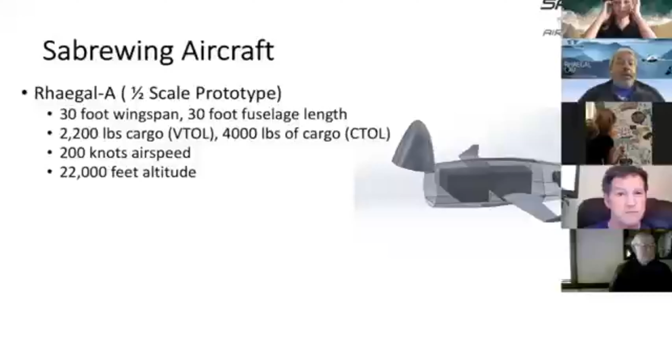I want to offer my congratulations to Dr. Roper and his team for achieving this revolutionary rapid contracting and prototyping method to bring industry and DoD together to develop this new exciting technology with both military and civilian applications. This technology will have great benefit to the needs that we have in Alaska and the Arctic, where conventional aircraft, vehicles, and vessels oftentimes can't operate.

Agility Prime is part of our Defense Department's long history of turning futuristic ideas into reality. I'm proud that the federal government is investing in revolutionary ideas. Agility Prime is leading the way.

This launch of Agility Prime is so exciting. This technology has the potential to make vertical flight more affordable and more widely available. And with the encouragement of the U.S. Air Force and the entire federal government, American companies employing American workers can gain a head start and win a fair share of this lucrative market.

eVTOLs have the same agile, vertical takeoff and landing capability as helicopters, but are quieter and should cost much less to operate because of their electric motors.

We are becoming a trusted innovation partner in commercial tech. I could not be prouder of this initiative. I could not be prouder of this team. And I am excited to see how quickly we can go to help commercialize this market for our nation, so that our warfighters have options they don't have today, and our nation has an economic advantage far into the future.

So it's truly a great credit to Agility Prime. They can put on this virtual event with so many hometowns of the United States represented. Industrial base is not really about just what a country can make. More than that, it's about the people who dream up what to make, and then, of course, those people who make it.

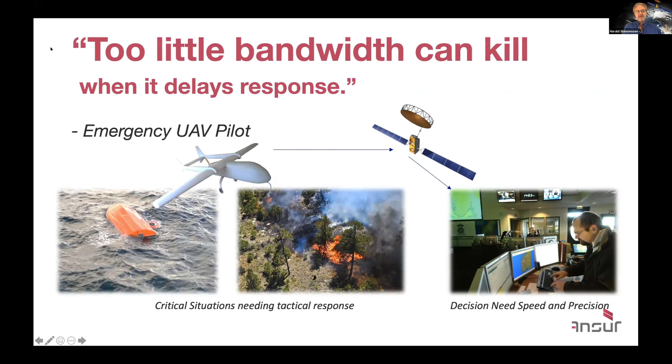I talked to a UAV pilot a little while ago, and he was concerned about the time it took to get his photographs, as part of a search and rescue operation, to the rescue team. He said they were always struggling with the bandwidth problem, and images could arrive too late - people were hypothermic, could drown, could freeze to death. Sometimes it was a matter of minutes, and he literally said too little bandwidth can kill if it delays my response time to the critical content.

I'd like to take you back to the birth of information theory. In 1948, Claude Shannon wrote a paper called A Mathematical Theory of Communication. The year after, his colleague Warren Weaver placed his theory into a bigger perspective. I mentioned earlier I was always working with signal processing, compression, and modem designs, so as an engineer we have been solving the problem of rate distortion - how do you get as much bandwidth as possible on the modem, and how do you compress the sources to as little as possible? But if you talk to an operations manager in the control center, they would probably say something like, I don't care about bits and pixels.

I need to see what I need to see in time for me to respond to it. So it's all about content that has effect on the operations.

This 3-layer communication model was actually written about already in 1949. And I've seen papers that state we probably missed this, and we have been solving as engineers the wrong problem, and the decision makers need another solution in a way.

The 3 layers outlined already in '49 were: the one we all know, how precisely can symbols be transmitted at a certain rate or limited bandwidth. But the next level is how precisely do these transferred symbols convey the desired meaning or content that you need. And finally, how precisely does that content affect the operations?

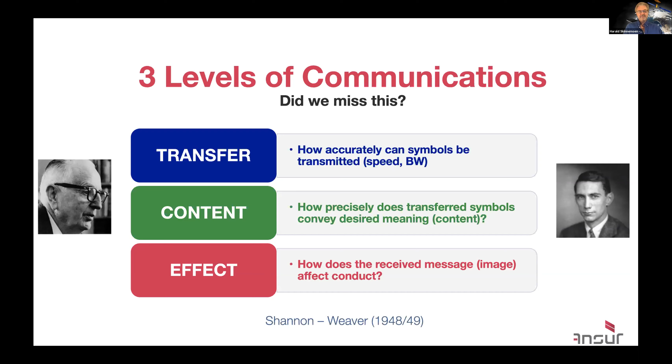What we found is that by focusing bandwidth on content that really matters, we can save as much as 99% bandwidth. So this is much more than just regular compression. It's a new way of thinking about how to and what to communicate.

We all know this. But what if you can cherry pick exactly the parts of the image that you need? For example, by drawing on the received image and saying, I need that part, or letting computer vision AI just decide that part. Then it becomes a bit like CSI Enhanced - you say, I need this specific part in full precision. And that's the way our software basically works.

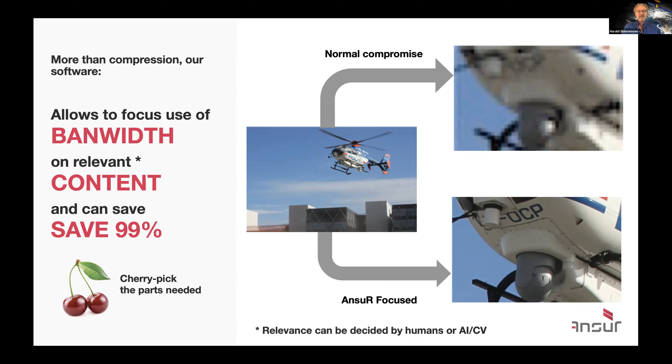You can extend that concept to videos as well and other sensors. So here's an example. If I shoot a photograph with my smartphone, or with a drone camera, or with whatever platform, in high precision, I always tend to compromise and send a lower resolution version. Feel free to scan the QR codes when this slide is up there.

So then we're getting a web quality or a little bit higher resolution image at the other side, but the original is still sitting at the camera. We have then the possibility to pull specific regions of interest from the receiver's side, who is the decision maker with the intelligence and analyst expertise. You can get exactly what you want without delaying the non-essential parts.

Let's see if this plays a little drone video here.

From the receiver side, you can choose what segment of the video you need, the resolution, the frame rate, and the quality of the video. And instead of being 150 megabytes or something like that, this video is just a few megabytes. So it gives you faster, more responsive information, basically.

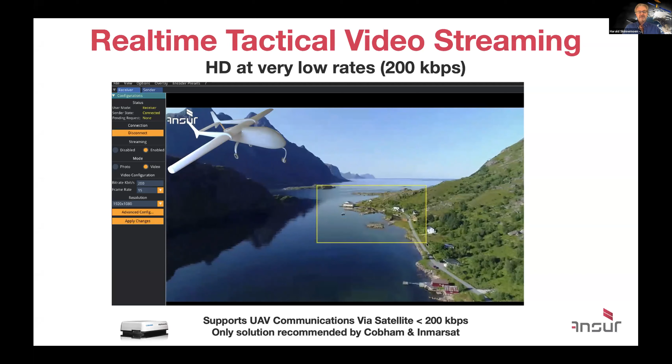Here's the HD, and you may have seen the mouse drawing a region of interest, saying I want to focus my bandwidth on this part of the image, but I want the full 4K resolution for that part. While you're doing that, you can still record onboard the drone or platform the full 4K precision, and through the storyboard I showed you on the previous slide, you can always access that if you need to.

Based on what we're doing, we won something called the Critical App Challenge with Airbus Defence and Space. They wanted to implement, and have certified our software for this specific hybrid device, which uses private mobile radio and 4G networks. It can also tether with satellite links.

US Marines came across our software in January, and we did an exercise in Norway, north of the Arctic Circle, through Iridium Certus at the time, streaming high definition around 120 to 130 kilobit per second. Captain Des Hill, who was in charge of the event there, posted on LinkedIn, pretty amazing technology from AnsuR Technologies.

One of the cool things is that we use this for disaster emergency management with the United Nations, and we have installed our servers at CERN in Geneva. Those of you who are a little bit nerdy will know that this is the place where Tim Berners-Lee invented the World Wide Web, and the world's first web domain is cern.ch, and we have our software running there. So I find that quite cool, but it's also quite nice that we're helping the United Nations save lives in disaster emergency management with this.

For drones and UAVs, typically you would operate on the radio link, which can range from 10 to maybe 100 kilometers. The drones like the one you see at the bottom here have maybe 1,000 kilometers range. So having satellite communication basically unleashes the full operational range.

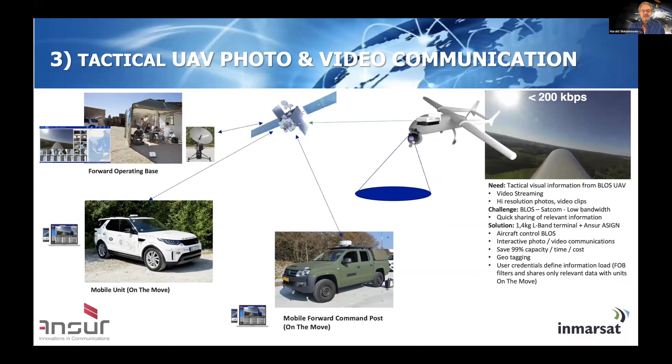One of the scenarios we've been demonstrating with Inmarsat for special forces in Europe is this double hop video from drones to multiple vehicles and forward operating bases. This is quite attractive and working fine with a solution where you have a server in the middle and low bandwidth. You don't have to be concerned that the receiver side might be on equally low bandwidth that the UAV is on. Our software offers one of the most effective photo-video communication solutions with very high precision using the least bandwidth. That's the main objective. It lets users prioritize communication bandwidth on specific parts that really matter, and can reduce network bandwidth requirements by 99%, speeding up access to high precision relevant content.

I'm sorry to interrupt you, we're just going to have to go ahead and switch on to the next person here. Yeah, it's finished, oh okay great. There's a few questions for you in the Q&A, if you want to go ahead and type your answers there for folks. Definitely a few people with more in-depth questions for you. So thanks for coming on, Harald, appreciate it.

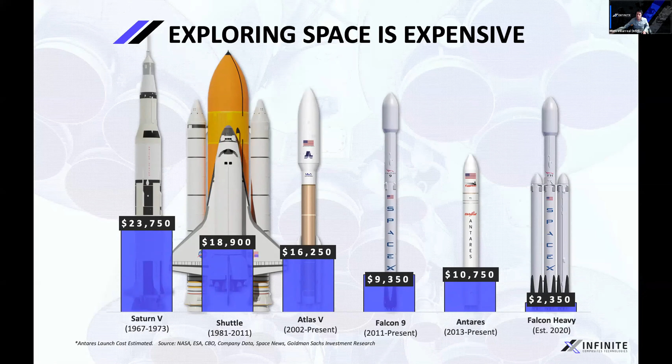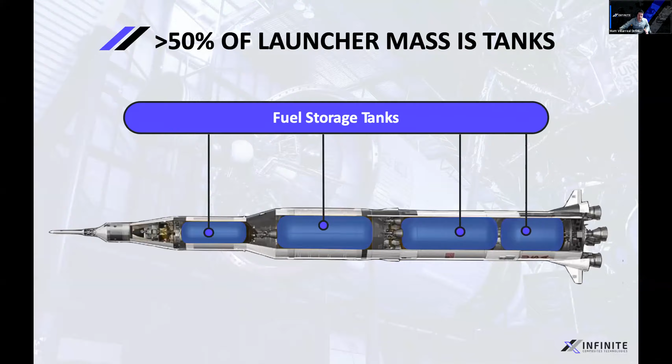Over the past 50 years, the cost of sending cargo into space has been driven down by more than 50% due to the introduction of new launch vehicles built by startup companies, led by billionaire tech entrepreneurs with grand visions of exploring the universe. Major innovations have been made around engine technologies to increase how much cargo weight can be lifted into orbit, but we've made little progress around reducing the heaviest part of almost any spacecraft or launch vehicle: the fuel storage tanks. Even on lunar landers and satellites, fuel tanks can make up more than 50% of a vehicle's empty weight. These highly engineered tanks often serve as many vehicles' primary structures. There can be more than 100 tanks on board per flight.

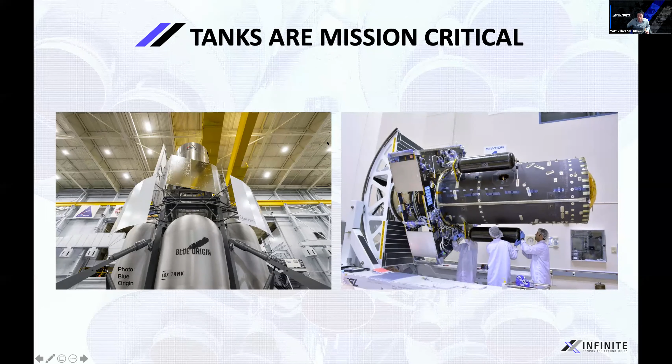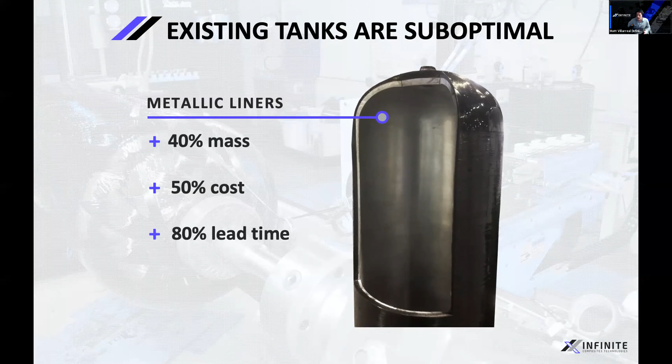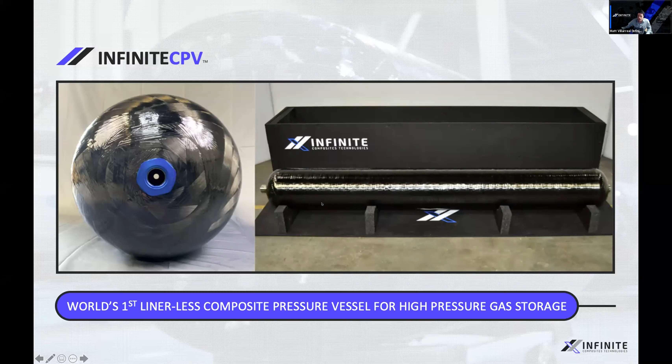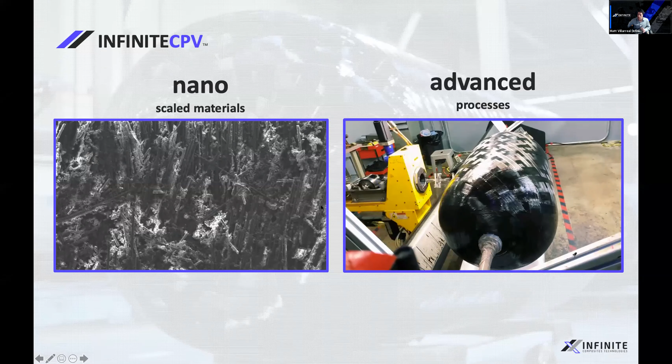Even state-of-the-art tanks typically require a metal liner to contain the gas. These liners are a major driver of mass and cost, and their lead times can extend expected mission timelines from months to years. My name is Matt Villarreal, and I'm the founder and CEO of Infinite Composites Technologies. Along with my co-founder, Michael Tate, our team has spent the past 9 years working to achieve what has been the pressure vessel industry's holy grail for decades. That's why we introduced the Infinite Composite Pressure Vessel, the world's first linerless composite pressure vessel for high pressure gas storage. Our technology leverages nanoscale materials and advanced processes to eliminate the need for a separate metal liner and provide the optimal solution for storing compressed and cryogenic fluids.

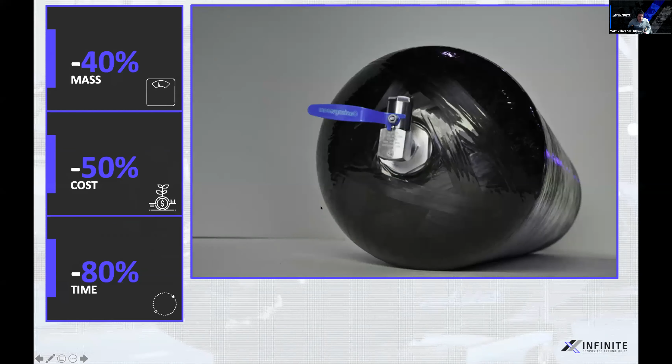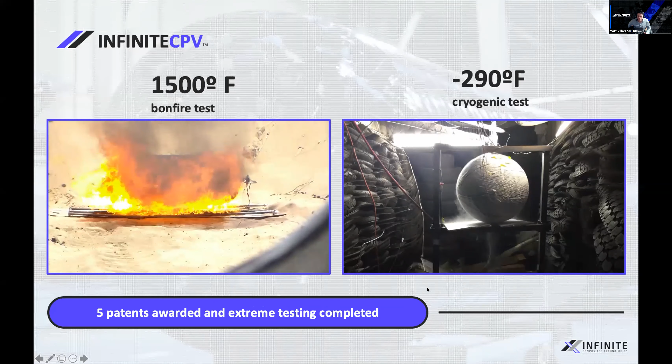This enables up to 40% lower mass, up to 50% lower cost, and 80% shorter lead time versus state-of-the-art tanks. We've been awarded 5 patents and have put our technology to the test in extreme conditions to prove their safety, even in the harshest environments. Since our founding, we've delivered more than $3 million in contracts to customers like NASA, the Air Force, the Army, and private space companies. Already in 2020, we've delivered 11 tanks to 2 different NASA centers and a private launch company, and have secured contracts to deliver 20 more by the year's end, a 500% increase from 2019. This includes initial hardware for a 300 satellite constellation, multiple space launch vehicles, and an electric passenger aircraft. These projects alone will grow to 780 tanks and generate $11 million by 2022.

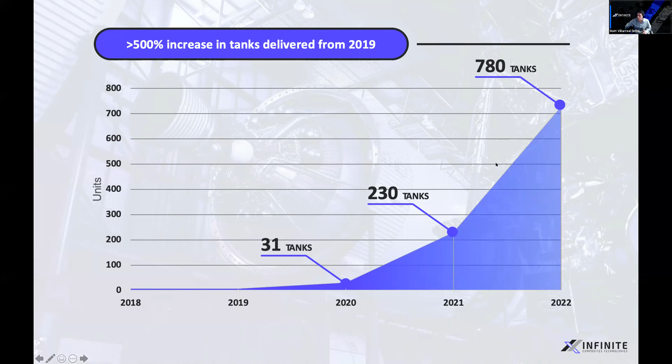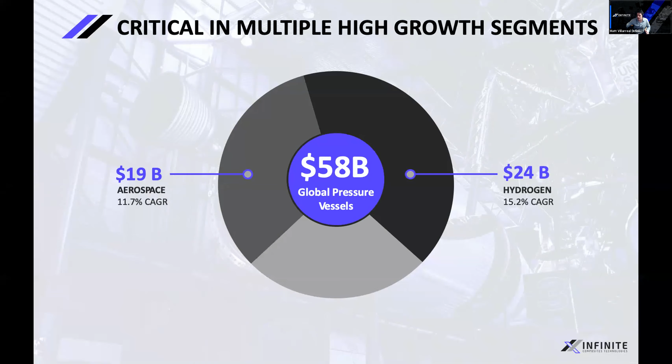Our technology is a game changer in a broad range of applications: underwater, on the ground, in the air, and beyond. While space is our beachhead market, the overall demand for the $58 billion global pressure vessel market is booming. And with the emergence of the hydrogen economy, the industry is poised for exponential growth over the next 5 years. I'd love to talk to you about how our projects can keep your projects underweight, under budget, and on schedule.

Thank you. Hey, thanks Matt, just a couple of questions. I think as it applies to our Agility Prime community, the most interesting topic is hydrogen. Just a little bit on your tanks - what kind of pressures are you rated to, and what kind of mass fractions are you getting to for hydrogen storage?

On the mass fractions, without going to any exotic fibers, we're able to get roughly 10% storage efficiency. The tanks we're building for the electric aircraft are 5,000 PSI hydrogen tanks, but we've built tanks that go up to 14,000 PSI, even after 20 years of simulated useful life, so 20,000 pressure cycles. The upper limit on pressure isn't necessarily a limiting factor, but the tanks we're building right now are 5,000 PSI for high pressure hydrogen. We've also got an MOU with the Air Force Research Lab for liquid hydrogen tanks for an aircraft program being developed by them.

Very interesting. And I guess the main difference here is that you aren't using the metal liner. Are you seeing comparable leakage rates or seepage?

The permeation rates on our tanks are similar to Type 4, which is plastic-lined composite wrapped. That data is a little dated, about 4 years old, but we're about to do another permeation test on the hydrogen tanks we're building for this aircraft program. So we believe we can get nearly on parity with the metal-lined tanks once we get that new data.

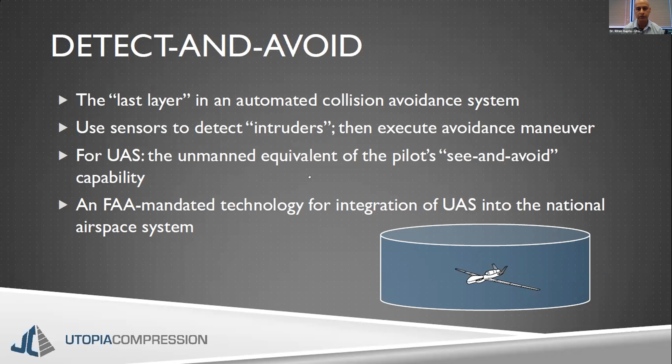So specifically what we do is passive ranging, and I'm going to talk about why that is important. There's many ways to detect an intruder - cooperative ways such as ADS-B or ACAS-XU, but obviously not all intruders are cooperative, and we need to be able to handle any intruder. So non-cooperative ways involve using sensors such as radar and optical. Our forte and our product uses optical sensors.

And why are they important? Well, optical sensors are basically cameras. They're small, much cheaper than radars. They're low power and they're passive - that means they're non-RF emitting. That's very important because you don't have to worry about compliance issues with RF. Obviously, in a military setting, passive is important because you might want to be covert, but regardless, there's many advantages of being passive.

Okay, but there's issues with optical. Anybody that's aware of the idea of tracking and estimation of targets knows that with an optical system you can't estimate the range because a camera image is just a 2D projection of the 3D world. So the ways to get around that are if you have multiple cameras. Stereo camera systems allow you to do what human eyes do, and they can be used to estimate range. Or you can fly in a meandering path, and if you get multiple views of the target or of the intruder, then that can be used to estimate range.

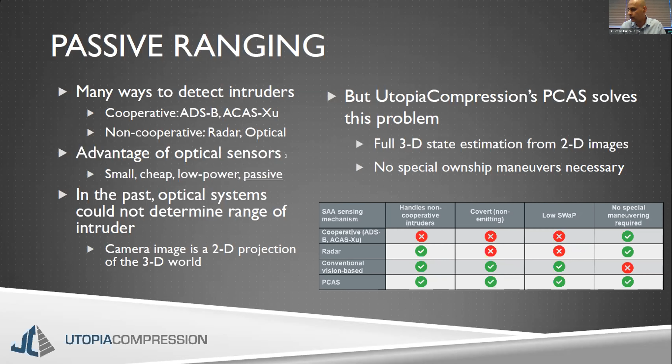So what our technology, which I'll be talking about, called PCAS, does is it really solves that problem. It allows you to fly just in a straight line using a single camera, and it's low cost and lightweight, and gives you a full 3D estimate of the intruder without any of these special maneuvers, so to speak. Just want to make sure - yeah.

PCAS is basically a low-cost system. It does passive ranging for detect and avoid, but also for situational awareness for piloted aircraft.

Several applications are listed there. Obviously, flying cars and orbs is the focus here, but also small UAVs for package delivery. Search and rescue drones is an ideal application because you might have a drone with an optical sensor looking down at the ground for survivors, or a law enforcement application where you want imagery of the ground. In those areas, you're flying in relatively clear skies where optical sensors are ideal anyway.

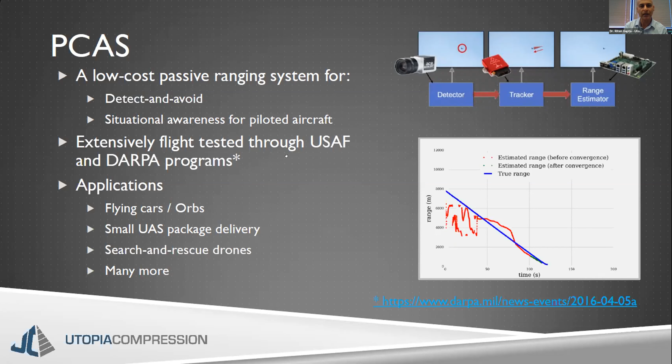So optical sensors would be ideal for detect and avoid as well, and many more. One I forgot to mention is military applications for surveillance and reconnaissance. We actually have interest from the Air National Guard for the MQ-9 program for a long distance version of this, where being passive is of paramount importance, since these aircraft have high power optical sensors on pods such as the MTS-B pod. We've been in discussion and have an MOU, and we're trying to get AFWERX interest in carrying out that program. We feel confident something will happen there as well.

Lastly, the past, present, and future. Up till now we've had a lot of funding from the Air Force and DARPA. The initial motivation came about for a passive ranging solution for the Global Hawk. So far, our systems have been single camera, 40-degree field of view systems.

Currently, we are collaborating with New Mexico State University and their UAS test site, and we have funding from the FAA to demonstrate an expanded field of view, 220-degree system. We have four test events planned over the coming year, of which we've already carried out one. So we're excited to push this further.

Obviously the future will involve commercialization of this product and entering the market. As I said, it's very important for UASs because this is an FAA mandated technology, but participation in Agility Prime would be a great desire of ours. We're looking forward to working with anybody that has interest in detect and avoid, or any other interest in this technology. We're happy to work with anybody and answer questions. I think I'm at the end there.

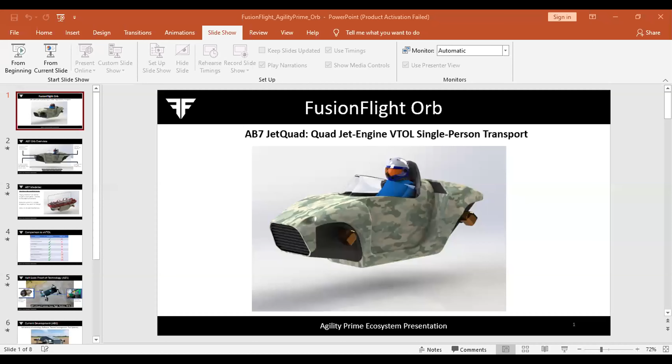We've been developing a VTOL jet-powered vehicle since 2016. My company is a startup, very small, I basically do everything at the company. I still work out of my garage at the house, so that's kind of like the background.

So I'll start by covering our single-person transport, which you can see on this first slide. This is a concept based on our half-scale model. As you can see, it is the most compact type of orb that you could possibly have for a single person. It is powered by 4 microturbine jet engines, each outputting 120 pounds of thrust at full throttle. Each engine is equipped with a proprietary thrust vectoring system that allows vertical takeoff and landing operation, hovering, agile maneuvering, as well as high-speed downrange travel.

State-of-the-art avionics allows autonomous mission execution. That means that the pilot's hands are free, he's able to use and do anything with his hands as he sees fit. A vehicle, as you see here, would have anywhere between a 20 to a 30-gallon tank, again depending on the application. So that is the first application, would be this high-speed single-person transport.

In the same configuration, we could build emergency medical evacuation, a medevac - as I call it, a flying stretcher. It's very compact, so it can land in very tough to reach places that are normally inaccessible by helicopter, and then evacuate the patient to a nearby base or hospital at very high speeds. Again, for this non-aerodynamic version, you're looking at something like 250 miles an hour. And of course, it's based on the same platform as the single person transport, so one technology can give you both of these vehicles at once.

Now I just want to explain that this is not an electric VTOL concept, this is a jet powered concept. It's fueled by heavy fuel, diesel, Jet A, kerosene. And it has a lot of advantages over eVTOL, which is commonly found in the ecosystem today, and there's a number of items why it's advantageous. Of course, it refuels in minutes, you don't have to swap batteries or wait hours to recharge.

Heavy fuel compatible - out in the war zone on the battlefield, diesel, Jet A are readily available. It is long range - again, the vehicle that I showed you there could travel up to 60 miles one way. Obviously high speed, turbine jet engines are not limited to speed as much as propellers, so you could potentially build something that travels close to the speed of sound. It's highly compact and does not weigh a lot, so this small single person transport unfueled weighs roughly about as much as a single person, maybe 130 pounds, easily carried by 2 people, fits on the back of transport such as a Humvee.

Of course, you got your high altitude operation, very high altitude - again, rotors, propellers cannot reach and operate well at the same altitudes as turbine jet engines can. You get weather resilience since you're using thrust vectoring and the engines are internal to the vehicle, no moving propellers, no external airfoils. And it is an affordable system because it uses entirely off-the-shelf components.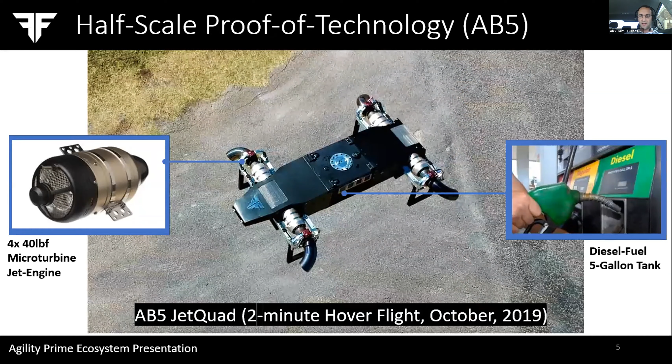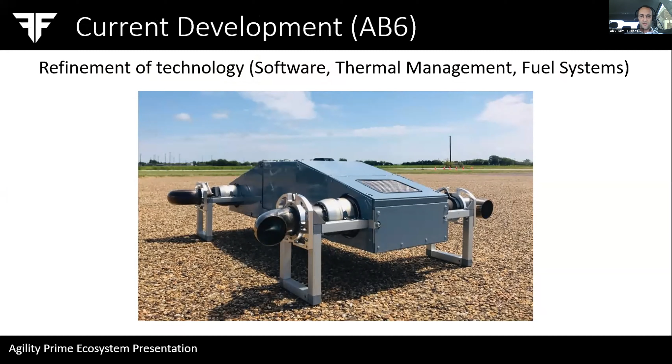Currently in development is the AB6. As you can see, it's the same half-scale model, except I've refined many of the technologies to make it a more reliable vehicle — including software, thermal management, fuel systems, and pretty much everything. I'm ready to go into qualification flight testing for this vehicle within the next several months.

Just a brief overview of where we were and where we're going. We received an original seed investment of $50,000 in 2016 to build this half-scale version, and achieved stable hover in 2019. We require about $5 to $20 million in investment to finish R&D, scale up the version, and transition to production, including establishing a facility. At the moment, I'm doing everything out of my garage. Finally, if everything goes to plan, we will have the AB7 orb available for purchase at an affordable $400,000 per system, hopefully from year 2023 onwards.

For more information about the vehicle, detailed description, and specifications, you can go to our website. There's also a YouTube link for the flight video of the AB5 jet quad. If anybody has any questions, I'll be more than happy to answer them.

Yeah, for sure, Alex, that's great. Interesting to see you guys are getting ready to start doing more certification flights — really exciting stuff there. So I have a couple of questions from the audience here.

Bill Kleinbacher is asking about range, performance, payload, and speed. So the payload for this AB7 would be 200 pounds — that's what we're shooting for. It's basically a standard weight for a human plus some gear, not a lot. Expect the range to be about 60 miles one way on a single 20-gallon tank. That flight will take about 15 minutes, going at approximately 250 miles an hour.

There's an anonymous attendee who just wanted to give you some motivation — Steve Jobs also started in his garage. So, okay, thank you.

Just a little bit on the acoustic signature — I assume it's pretty loud with the turbines. Turbines are a common misconception that they are much louder than eVTOL, but this is very high frequency noise, so it dissipates very quickly with distance. If you're up close, 1-2 feet away, it's very loud, but once you get past 20-30 feet, it's not even that loud anymore. Any propeller-based vehicle, electrical or not, generates quite a lot of noise, so it's worth exploring whether jet engines are really much louder than very large propeller blades spinning at high RPM. On top of that, we are exploring noise suppression systems — the AB6 prototype has specially designed intakes and a body that suppresses a lot of the noise from the turbines. I have 2 little kids at home, and they do tests in my backyard and sleep just fine through them, so I don't think this is going to be an issue.

Gregory was asking why there are no wings on it for transition to horizontal flight, and whether we explored having aerodynamic surfaces. Absolutely — you can head right to my website. We have explored it. Boeing and NASA did a great study on the blended wing body design, and that's really the optimal design for us because it has a very large internal volume, so we can fit our platform with the turbines in there, and we can also use the whole body as a lifting surface.

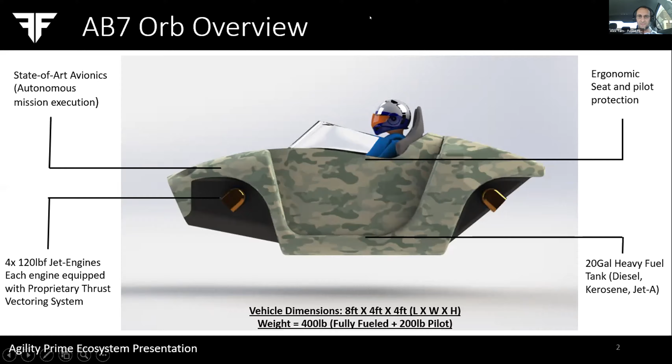So we're going to switch over now to Mr. Michael LaCourie, CEO and founder of Aereo. Michael, did you want me to share your slides for you? Actually, can we skip me? It's been churning trying to connect to Zoom for the last 15 minutes, and I don't know why I can't connect in. So maybe skip me, come back, because I don't think you have the current version of my PowerPoint. I just discovered that—okay, we'll skip you, we'll catch you at the end. So okay, Mike, thanks, if you're ready we're going to switch over to you, Mr. Mike Bartlett, founder and president of American Aerospace Engineering.

Certainly. Mike, just turn on your camera there as well. Thank you, sir. I want to get my camera on. Oh geez, there my camera is on. Can all see me? Yeah, perfect. If you could just go to full screen. Perfect, full screen, and how's that? Off to the races, sir. Over to you, thank you.

Thanks, Sterling, and thank you for the invite, I really appreciate it. I'm Mike Bartlett, president and founder of American Aerospace Engineering. We're in the business of designing, developing, and building full systems—a system of systems—VTOL aircraft, predominantly tandem tilt wings. We've been doing this for quite some time.

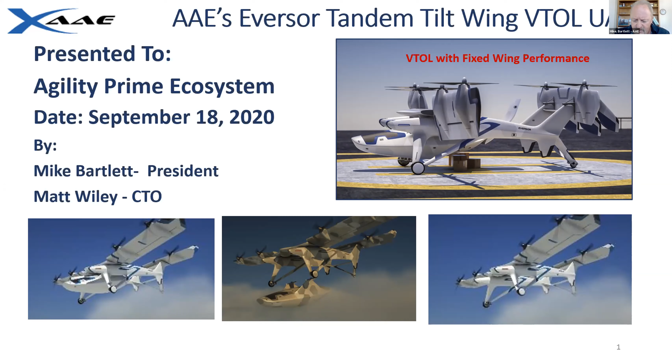I don't know if you all can hear me well. I'll carry on. Yeah, sounds great. Good. My background—I've been around a while.

There's my email address, the website for American Aerospace Engineering. AAE was founded in 2008. As I said, I'm the founder, sole owner, chief engineer. I've got 40 years of aerospace engineering experience with 23 years of FAA flight test. I'm a fixed wing, rotor wing pilot, FAA certified, instrument rated pilot, was a captain in the Air Force, and graduated from National Test Pilot School a few years back. I've been designing and developing UAVs for over 14 years now, and two of the well-known ones are ScanEagle and Blackjack. I helped with the continuous improvement of ScanEagle and helped in the initial flight testing of the Blackjack, getting it into a STUAS program.

Okay. Just as our progression—in 2008, the top figure on the left-hand side is our proof of concept. There's a 40-foot wingspan, internal combustion engines, and you can see the sheer size of it by the folks standing next to it with the wings tilted. The picture below shows the vehicle without a payload bay, and then various other images of vehicles we have.

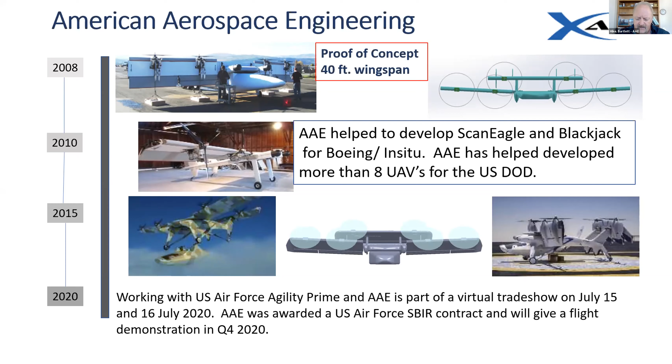The AAE Eversor family of products are fully scalable, and we address all the groups of UAVs - it's the same vehicle, just scaled. Group 1 is 0 to 20 pounds, group 2 up to 55 pounds, group 3 larger up to 1,300 pounds, and group 4 over 1,300 pounds. We've done UAVs from 5-pound UAVs, and I've designed UAVs up to 20,000 pounds, so we've covered the full range.

We don't just do the aero performance, we do the materials, the composites, the avionics systems, the software, propulsion systems, ground control stations. We're a one-stop shop.

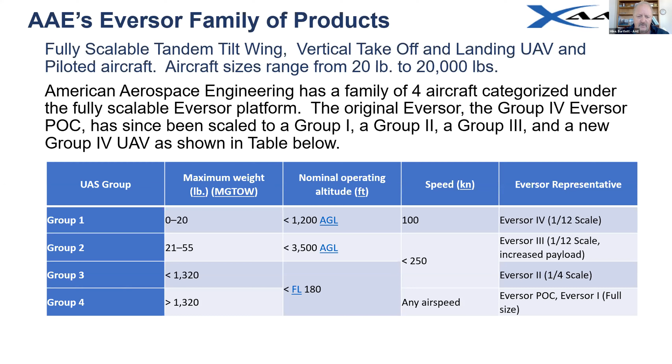What's unique about this vehicle is that large payload bay is detachable. It's also designed as a lifting body - you could see that quite quickly. We've done extensive CFD work on this vehicle, and the payload bay generates over 30% of the overall lift. Also, we're not dedicated to that shape of the payload bay.

We envision that a customer would have a family of payload bays dedicated for various missions. Also, what's kind of neat about this vehicle is the payload bay can move back and forth, so it has variable stability - if you're coming in for an approach, you'd want a forward CG for a more stable aircraft. If you're on a long range flight, you go a little bit to an aft CG to reduce trim drag. Coming into the hover, obviously you want it in a mid CG, and this is all done via the autopilot.

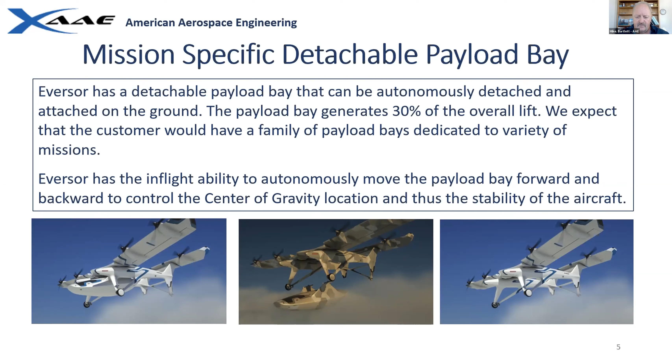Our mission right now is for the US Air Force SBIR award. The award was for an unmanned aerial system aircraft rescue and firefighting program. For phase one, we're doing a flight demonstration with our 360-pound vehicle, showing that we can douse out a fuel spill fire about 3-foot diameter in the hover. We are demonstrating 2 fire retardant techniques: using a sky cannon coupled with an infrared camera to disperse the fire retardant with pinpoint accuracy, and a second method, the air attack method, of just flying over the fire and dumping the fire retardant on it.

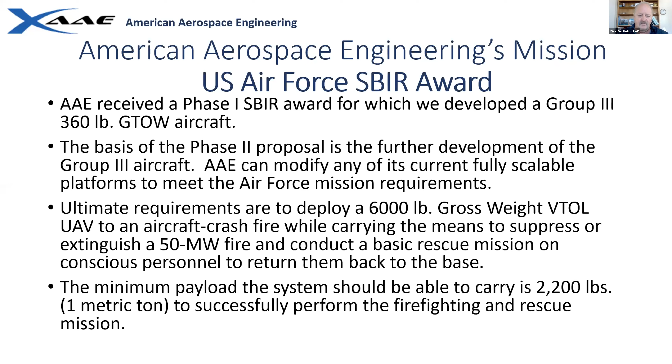We received the SBIR for the 360-pound vehicle. The basis of the phase 2 proposal was that the Air Force were looking for a UAV that could be stationed at their Air Force bases. If an aircraft takes off and gets in distress, or is coming in distress and has to do a forced landing outside the perimeter of the Air Force base - maybe rocky or forested terrain - this vehicle would take off and fly to that area. It could dispense 2,200 pounds of fire retardant, enough to put out a 50 megawatt fire, and then in the hover, it could basically hoist conscious personnel up onto the aircraft and fly them back, or hoist folks down to help get people out of the crash vehicle. That's the mission the Air Force is looking at for phase 2 and phase 3.

What is our role in the ecosystem? We've been working really hard for the all-electric FAA certified Uber Elevate challenge, and we've already designed the 8-seater VTOL. Battery technology is still trying to catch up for endurance and density, so there's a bridging opportunity for us to use hybrid, and we've done this already. It's also FAA certified - I've got over 23 years of FAA certification experience, so everything we do is DO-178C compliant. It's all FAA certified with multiple redundant systems, so if you do have an engine out, you're not just going to crash and burn.

We're also looking at VTOLs, working closely with the California Fire Department on large UAVs to help put out forest fires and rescue survivors in the forest, working with a company that's been around for 60 years called Simplex.

That's their job, doing supplementary type certificates on helicopters to attach these large tanks that carry water to put out fires. And they were looking at high-rise building fires around the world, so you could even use a smaller UAV in between the buildings to pinpoint a fire that's just started and quickly put it out.

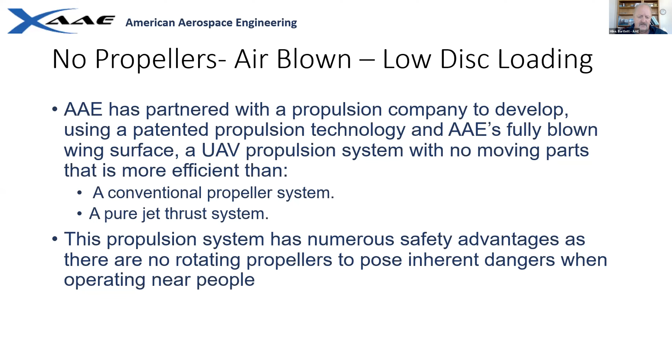So it seems to be more efficient than the conventional propeller system, far better and more efficient than the jet thrust system. And obviously, not having rotating propellers, as they do pose an inherent danger operating near people.

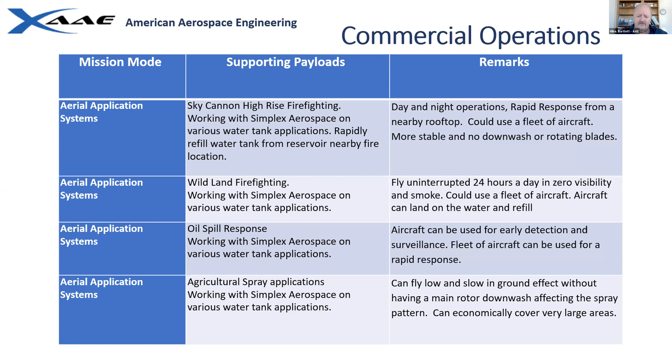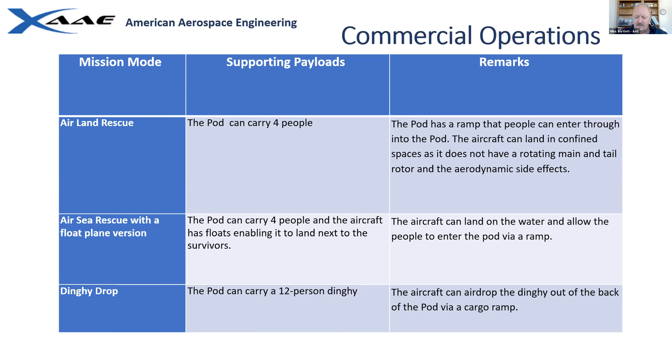Commercial operations - I'm not going to go through everything, but just aerial applications. We have the Sky Cannon for high-rise firefighting, wildland firefighting, oil spills, agricultural spray applications, air-land rescue - that's awesome because the pod we have right now could pick up 4 people very easily. What's exciting with the air-sea rescue operation is that the vehicle can have floats with very little drag penalty. It could land on the water, open up the ramp, and the folks could climb into the payload bay and it could take off, or it could fly low and drop off a dinghy for the folks at sea who need to be rescued.

FedEx has shown interest, and we've been talking to them for about 2 years now. We're sure that UPS would follow suit.

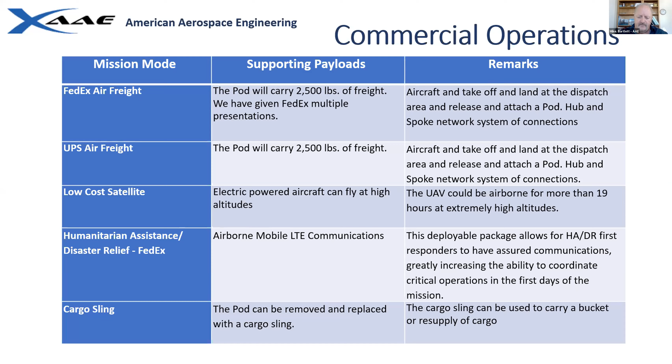Being electric, the solar powered version, we could look at high altitude, low cost satellites. A lot of this could be used for disaster relief, for mobile cell phone towers. It can be treated as a helicopter, so it can cargo sling loads and just drop them off. It can hoist folks up and down. Cargo drops - it's ideal for logistics resupply.

Also, EO, IR camera, ISR missions. It could have an endurance up to 19 hours. And it's ideal as a first responder for medevac, casevac, whatever the case may be.

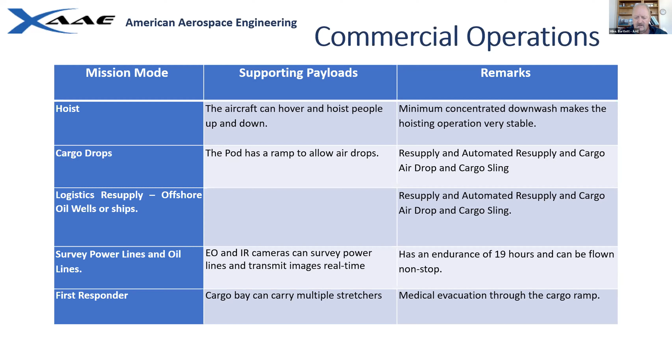What would be good is if there are folks interested, you could facilitate meetings with potential customers and investors if need be. We understand the US Air Force requirements for a program of record, and you did mention that you could get test ranges and certification support, which we would really appreciate. And I think that's my last slide.

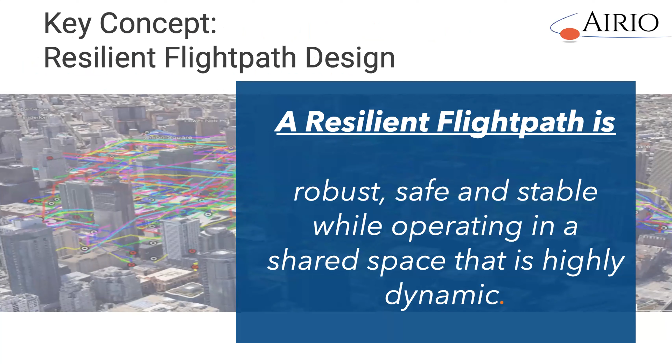We've identified 9 essential criteria for resilient flight paths. I won't spend a lot of time going into these, but they focus on mission objectives and defining the navigational space.

That's using digital twin technologies, for example, in urban environments, developing several kinds of flight path deconfliction, as well as midair detect and avoid deconfliction, making sure we're compliant with all the regulatory requirements. There's also the ability to execute the flight path in real time, which requires transferring that flight path information from the cloud, where we're doing the flight path planning, into the vehicle itself, and then having that vehicle execute the flight path precisely. I'll share with you how we plan on doing that.

The ability to manage simultaneous flight paths - we can currently do as many as 350 vehicles per square kilometer, which is an insanely large number, but we're really trying to push the boundaries of our technology. Obviously it's got to have certain management functions that allow operators to manage multiple vehicles at once, and we're relying a lot on machine learning and artificial intelligence to do that.

So the flight path automation system that we're developing has 4 core innovations we're bringing to the current system. One is new flight path creation algorithms. This allows us to deconflict the flight path in the process of constructing the automated flight path itself, so it allows us to manage multiple vehicles operating in the same space, trying to navigate around each other, but without actually imposing any conflicts.

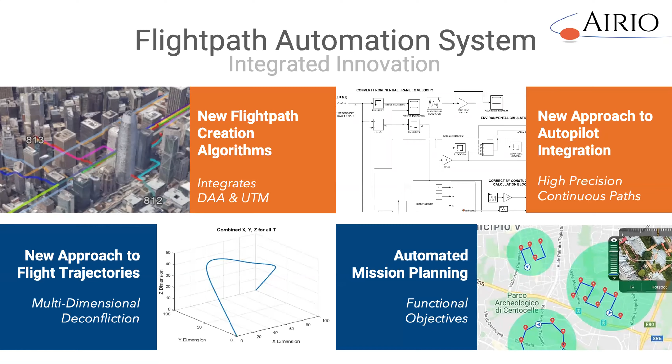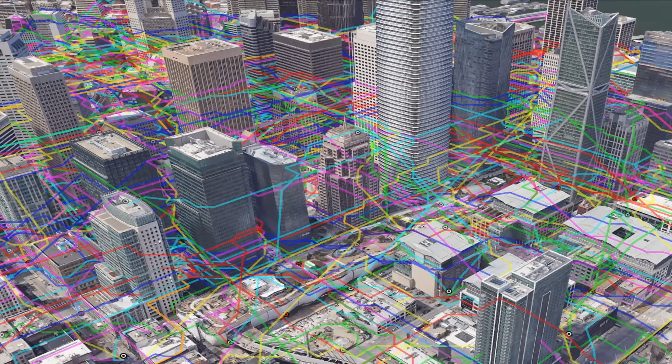So this is an example of one of our simulations. This was downtown San Francisco - that big tall building in the middle is the Salesforce Tower. It's about 1,000 feet, which is well above the 500-foot floor for the low altitude drone space. We basically ran a simulation with 350 vehicles operating in a 1 square kilometer section of San Francisco, and we were able to successfully deconflict all 350 of those flights.

The way that we do that is we've got 5 core components. There's a navigational space model, which defines the operational space in the environment. There's a pathfinding and auto routing section - this is where we take auto routing technology, mathematics that have been developed since about the 1950s, that allow us to take multiple traces and ensure they each have a unique path. We use cost function optimization to make sure there's solid alignment with the mission.

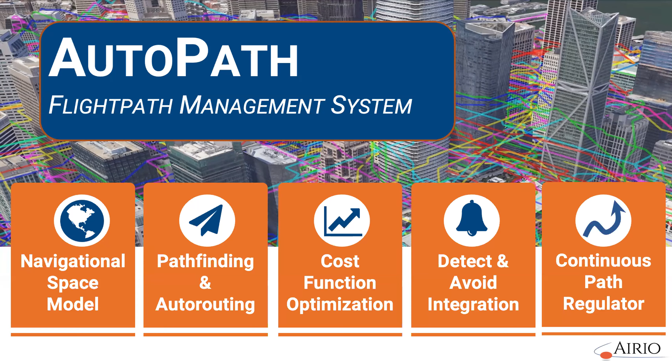We use detect and avoid integration strategies to allow us to avoid any unplanned mid-air conflicts. And then we have the continuous path regulator that translates that information into the vehicle.

So this is a simulation that we have of a number of vehicles in a vertiport configuration flying out of the ferry building in San Francisco. And you can see that it effectively sends each of those different vehicles off on its own path without forming any conflicts.

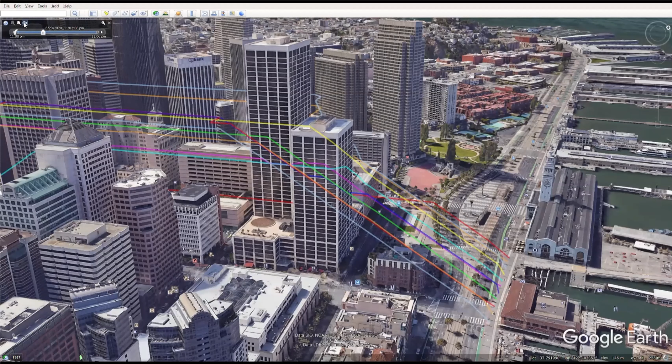In addition to that, we can align the pathways so that when multiple vehicles are headed in the same direction, they can converge into what we call a virtual highway - a temporary reserved space in the airspace that allows vehicles to migrate as traffic demand requires, but also allows for safer transportation of all those vehicles operating in the same direction.

So the system that we've got in development here allows for multi-vehicle path search and optimization. It allows for mission scheduling, so we can schedule out and plan for multiple vehicles operating over a period of time. We're planning on using automated UTM authorization systems through API calls, etc. We have the integrated navigation and tracking and reporting functions.

We've got 6 patents that we have access to, 2 of which are our own that were developed in 2019, and then we have 4 others that my co-founder David developed back in 2016 under a different company, and that company right now is just a shell company that owns the patents. So we've made an arrangement with them to further develop and commercialize those patents as well.

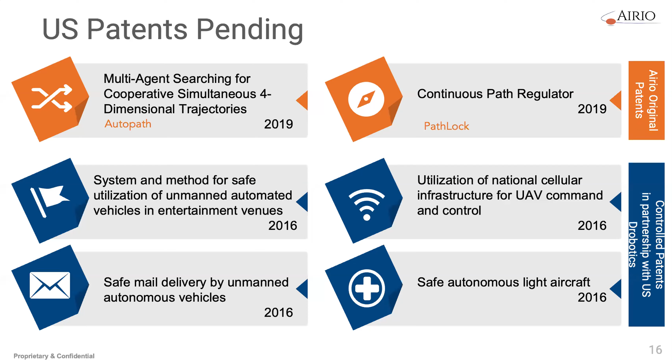So our invitation is to come play with us. We're just getting started. We're pre-funding, pre-sales, pre-everything. We're looking for test projects. We'd like to be able to bring some of these simulations out of the simulated space into the real world. So we're looking for some projects that we can help do that with. We're looking for partners and data providers, especially on the geospatial side.

Obviously looking for funding, just starting our seed funding campaign to raise some seed capital. We're looking to hire a couple of expert team members if you know anybody who's interested in what we're doing. Always open to having conversations. There's so much happening in the space right now. I think the more that we can align our capabilities, the better we'll be as an ecosystem. And then, of course, we'll be excited to have any kind of moral support.

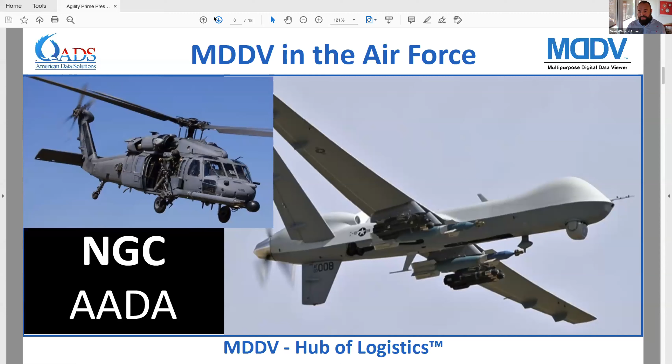How is it different than your normal interactive technical manual or your normal tech publication? Well, it's powered by the Windows technology. It's used in 91 of the Fortune 100 companies. It's able to optimize data sets and make it fully interactive. And the security features are second to none.

MDDV is disruptive. So here's the thing: it automates what needs to be automated and gets your technicians and your operators, your pilots, and all the people involved in your operation back to doing what they're trained to do instead of trying to worry about data.

We're able to automate all the manual paperwork and the data collection that's critical. We're able to automate supply transactions and all your fleet management requirements. And that enables predictive maintenance solutions to be developed for your preventative maintenance and your predictive maintenance schedules and forecasting, which I'll tell you is a huge deal from the technician side of the house.

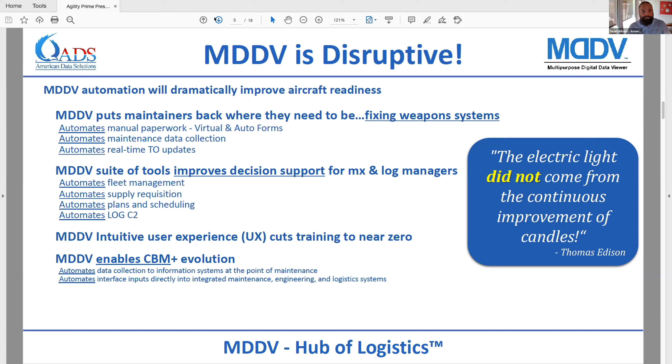We're able to support any data type, any data format. Like I said, it's fully customizable. And our development is very agile, and we're pretty proud of that because we have domain experts like myself and all the other members of our team. We work hand in hand with our programmers, and we're able to make sure that the UX, the user experience, is second to none, and we're able to make changes and updates in a truly agile manner.

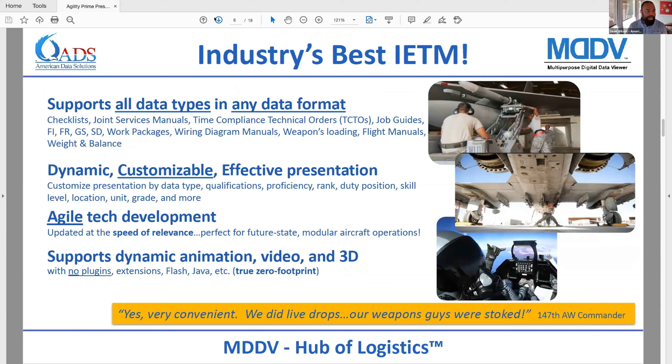So a couple of other tools, and I'll skip through some of the stuff, but we'll talk about MDDV Livewire as far as wiring diagrams are concerned. It's the best on the market. It's the most intuitive, and it's the most integrated. It can be integrated with your supply chain systems as well.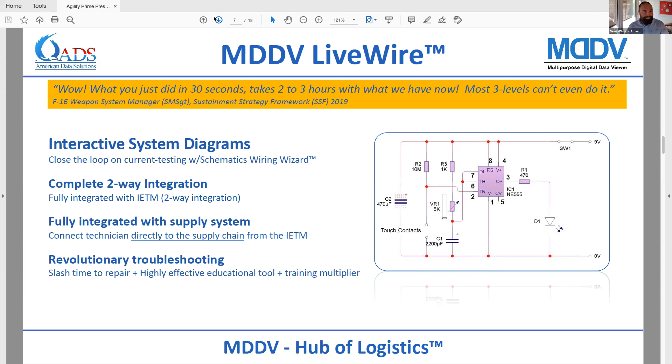And you look at that quote, and this is from a friend of mine who had been working on F-16s for 22 years. He saw the presentation, and he saw how fast we were able to do research to find the pin in a cannon plug that we needed, and how fast we could do it. Every maintainer that's seen it has been blown away, including myself, which is why I'm here.

Another thing is, one of the biggest things I hated about moving around the Air Force is learning new data systems. Well, this one is completely intuitive, and it takes minutes to learn. You don't have to teach a 3-year-old how to work an iPad when you hand it to them. You just hand it to them and they know how to work it. That's what our products do.

A little bit more of this. Again, we talked about the security. It's completely operating system and hardware agnostic. It works on anything. It's modular and customizable. We have lots of products and tools.

Like we said, our flagship product is MDDV, the technical publication viewer. However, it works with all these different modular software packages that we can put together.

We talked a little bit about CBM Plus, and I don't know if you guys are familiar with that, but it's the Air Force's solution for predictive maintenance. And it's implementing it. That's one of the last things that I was doing, was working on that implementation while I was on active duty.

Maintenance data collection, though, is crucial. What we found as we were trying to do all the analysis of all the data that we had—and we had obviously tons and tons of data after flying airplanes for decades—is that the data was often bad. And it was not necessarily at the fault of the technician that was inputting it.

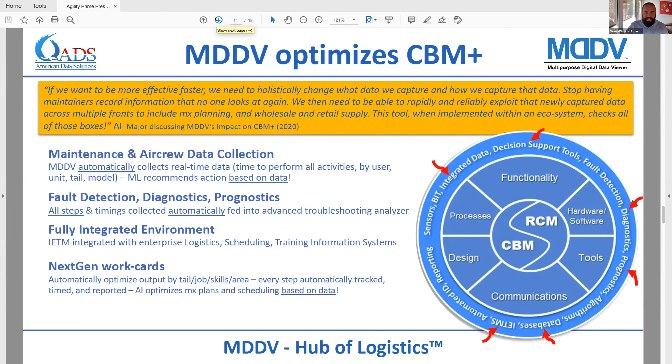It was the methodology for which we were collecting data that was flawed. So here's what we know: flying cars will break, orbs will break, they're still mechanical. You need to be able to collect that data from the ground up and make good decisions moving forward. I believe it's a good opportunity to take the lessons learned from years and years of flying aircraft, driving boats, driving cars, and make sure we lay in the eVTOL, the orb, the flying car program the right way.

The University of Dayton Research Institute took one process from the C5 Galaxy, from their major ISOs and home station checks, and determined in their cost benefit analysis that using MDDV would save 20 to 30% on all maintenance actions. What does that mean? I believe the biggest thing is the banner that says using MDDV will save the C5 program $34 million a year. That might not seem like a lot, but this is just the isochronal inspection and home station check process. If you scale that across every platform and all flight line and hangar maintenance actions, I believe we're lowballing the estimate at $700 million annually. It could be greater than that.

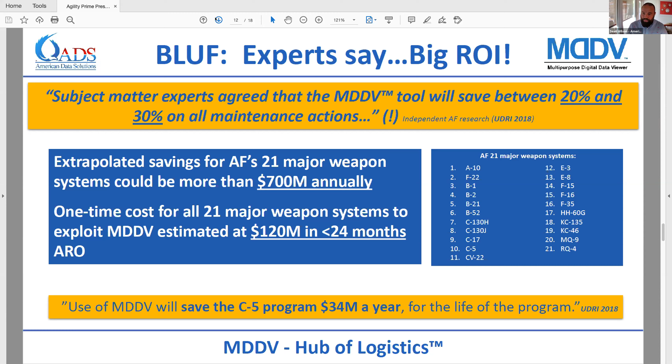As I mentioned before, I'm an Air Force airman, so you'll see that the presentation is largely Air Force centric, but the software is customizable. I like to say that if you have anything that requires technical manuals and is resource managed, we can solve your problems for you.

We talked a bit about the advanced technology. Our CEO, Ron Mraz, who started off as an aircraft maintainer, has over 100 patents for all the software solutions and data management tools we offer today.

We talked a little about the virtual maintenance logbooks. I think this is key. It's insane, I would watch technicians with their paper logbooks fill out a discrepancy and corrective action, then have to pick up their personal cell phones and call a maintenance operations center to enter a discrepancy into a system, and then the maintainer would have to go into the system and close out and input the corrective action. It's ridiculous that all those steps are required, and it's largely policy. We're not going to have that problem in the Agility Prime world if we start off initially automating and virtualizing all those requirements. Data is critical, it's important for decision support down the road, so we should make sure we do it right.

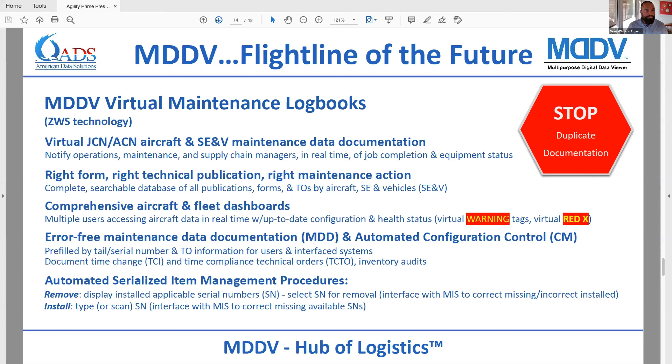Supply chain management, we talked about that. We can automate and virtualize any supply transaction as long as we have an authority to operate inside a system.

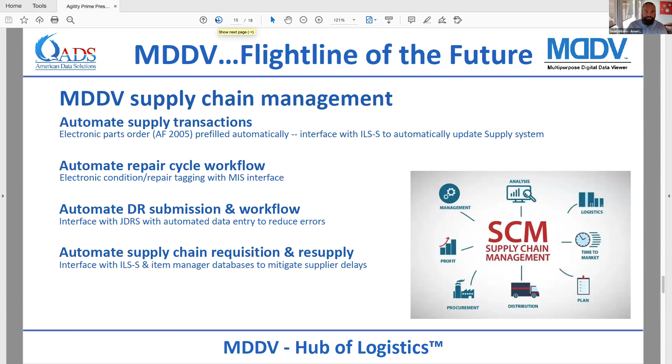And we talked a little about the social network. Like I said, this is my baby. Most of the young technicians who are going to be working on your vehicles grew up in the virtual age with iPads in their hands. They're used to doing that, and they're all on social media. So let's provide them a 100% secure social network that they can operate in.

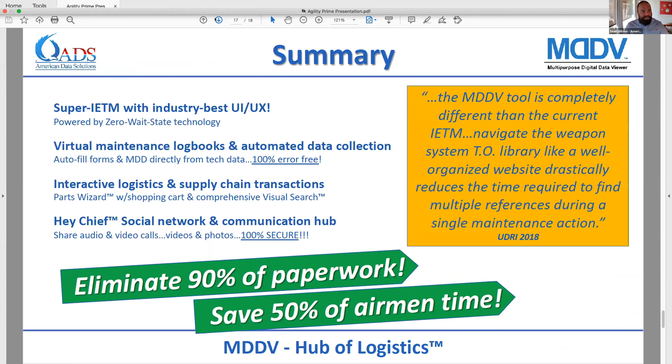Here's a summary: get rid of paperwork, save airman time, and that 50% mark estimate is really accurate. As an aircraft maintainer, I'll tell you we spend way too much time doing paperwork instead of fixing airplanes, and we don't want to have that problem in the Agility Prime ecosystem.